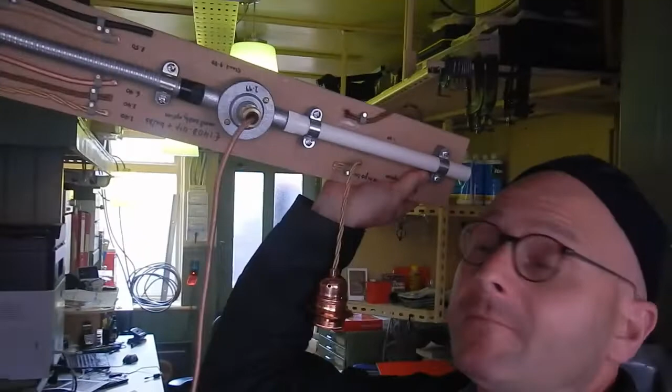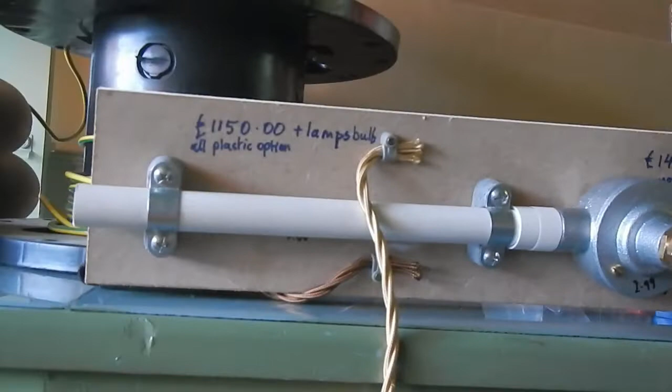That shows steel flexi conduit, plastic 20mm PVC white conduit, a rather nice through box and domed lid, a cable grip, and the lamp holders. It also shows a number of cables available, and then what I've done is I've priced all those options. I've said £1150 with the plastic option for the cheapest, and the most costly option £1,404 plus bulbs, that's plus the lamps. I've just basically priced everything, and then I went over to the client or prospective client and showed it to him.

So this is Sati, and he's got a very nice smile, but he doesn't have the keys. So he doesn't have the keys.

Hello everyone on YouTube. And this is Zani? Zara. Zara. We're rocking Zara. Zara from the Sahara. Right, I noticed it's gone out of focus again. From the best fish and chip shop in Littlehampton.

Beach Road, come see us. What we need to show them. So fresh fish, have a look at that. All the chips, so don't tell anybody. One of my videos got 19 people viewing, not 6.

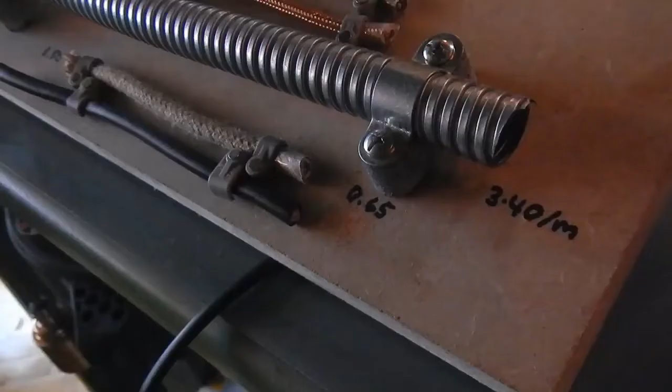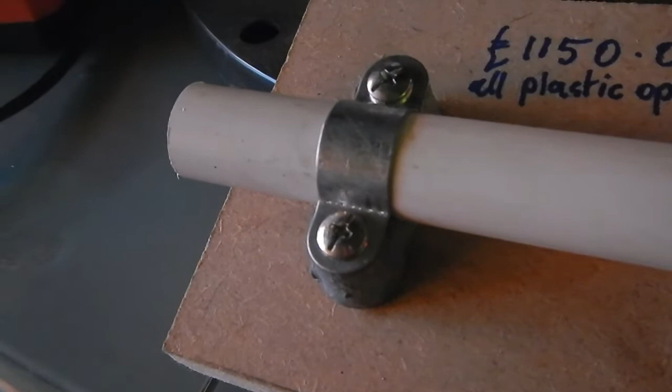So yeah, so here we are. This stuff I really like. I've used it in my workshop, and I'm gonna go and use quite a lot of this stuff anyway in the restaurant. So going behind the heater here, this is a far infrared heater, and the cable I just take up through there.

Although I have used Twin and Earth in this instance.

Hello, am I out of focus? Am I out of focus? Probably I am. And probably getting another good picture of my neck.

I'm just on my way to a potential customer who had his work done by somebody else and is a bit concerned about his paperwork.

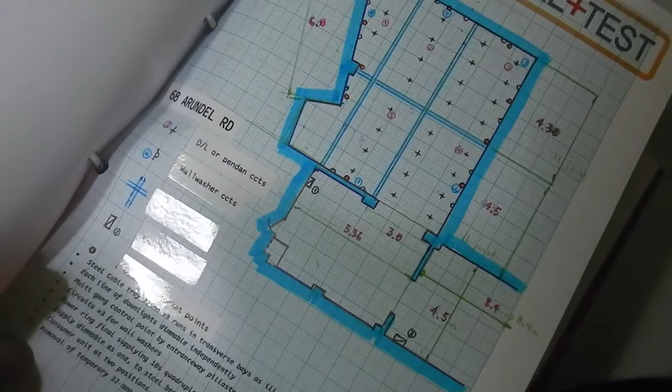And this was for showing where we were going to put lights. That quotation, again, that never got off the ground, that quotation. This quotation here is a breakdown of...

a schedule for fitting of an RCD, and I've given an example of a fitted RCD separate to the consumer unit, which is what I was trying to explain to him there. And then a breakdown of all the costs, which for him came to £317 for fitting an RCD, which is quite a lot, but then he had to have bonding and everything else put in. And that wasn't going to be quite so easy.

Some more diagrams. This is probably a sampling diagram for an EICR. This is a diagram from an EICR, so probably - oh, this is a quotation again, because it says quotation at the top here.

I've taken their results just to look them over. That gives me a good guide. That's why it is important to keep your results and keep paperwork with things, because it does help with quotations in the future.

So I found this was a big quotation for a complete rewire of a property. I went along, spent a couple of hours there and did all these drawings, and then I did a breakdown of all the costs,

and in fact whether it was ground floor, first floor, everything there, and then I totted this up in terms of labour, in terms of what I thought would be hours of labour. I then added them all up and divided them by the number of hours in a day, which is 8, to give the time.

The estimate I've given has already been altered, and I've written a confirmatory letter stating what I understood to be the actual agreement between us, but I haven't restated the quotation because he's not really worried. He's got a ballpark figure of the price, the value of the contract or the undertaking, and so he's not so worried about itemising everything as we go along, which I did offer him.

So the original quotation was rejected because he wanted to make changes to the specification.

So flexible conduit, there's 3 rolls of that. I think they're about £37 a roll. So yes, I've gone with 3. I've gone up a bit and charged a bit more for that. The third one I've charged £34 for. Yeah, £34. So actually, it's not that far off.

And then a 2-way box, galv. This second figure, the second row of the figures, 970 and 1663, gives the price with lamps included, assuming that the lamps are going to be about £14 each.

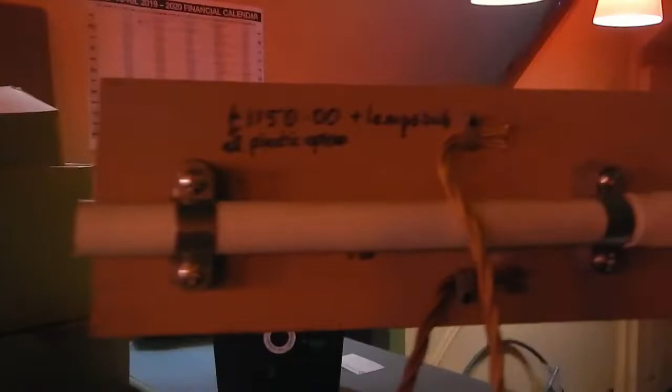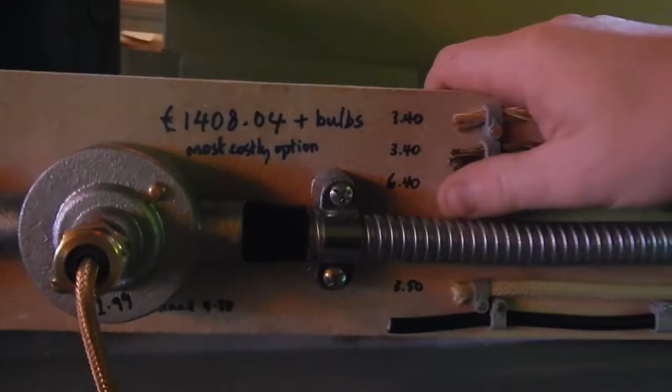You're looking at a copy of the letter sent to that prospective customer. I've blanked out his address here, and it basically just says you have instructed us to provide a new separately switched light circuit at the restaurant and so on.

The erection will be single conductors. You have agreed to a deal in which the labour charge is halved in return for allowing an acceptable period of notice, so on - that's something to do with our deal. And then a key will be needed for access.

So that is the final letter of confirmation of the contract, and if anything in that is different, he can query the letter. And then at the bottom I just have something to do with my terms.

Annex Alpha is the labour and materials breakdown. Test certificate and building completion certificate are provided. So an annex of the materials breakdown.

Here you're looking at the original quote letter that went with that annex breakdown that I showed you. Again, I've blotted out his address, and this basically just states that...

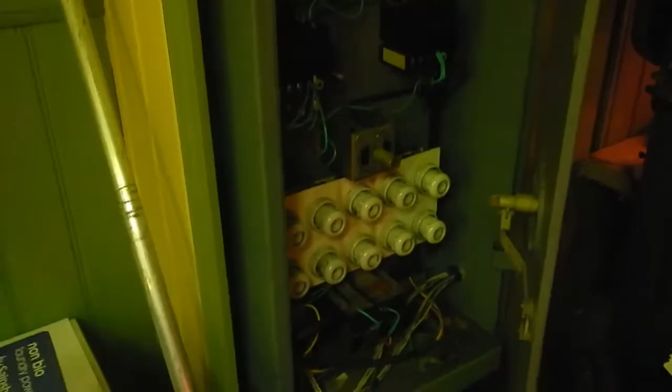In here I have welding kits, an Arga oxypropane torch, and a Makita big router, which I hardly ever use for electrical stuff, but I can if I need to. It wouldn't be in the van ever. Then just a cheapy orbital sander, which again I don't carry with me, maybe I should. And these are spare bits that I buy from Lidl's, which I use as and when.

Here's my stock cupboard. I've got RF switches here, RF switch receivers and transmitters. I've got grind discs here, which I got on a deal from Screwfix. I've got some Zano 1 to 10 volts there, and a couple of downlight drivers for the downlights that I've used before now.

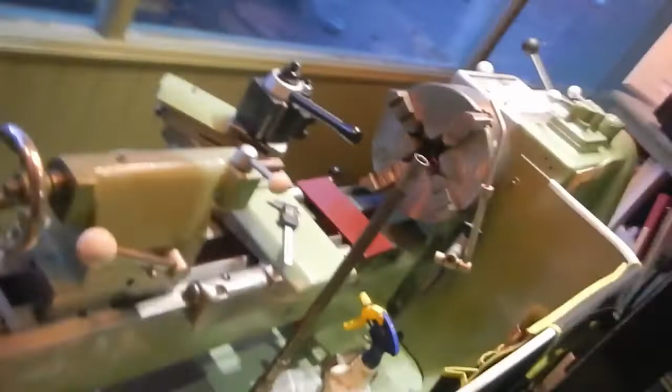I've put them into this tray, and this is for lighting all the machinery up. So you can see it lights the mill table up, it lights the Myford up nicely, and the old Harrison, which is still undergoing some level of renovation. I'll put a new tool post on, which I had to make parts for, and the compound slide there needs parts for it as well, which I've got, but they just need machining and slightly changing.